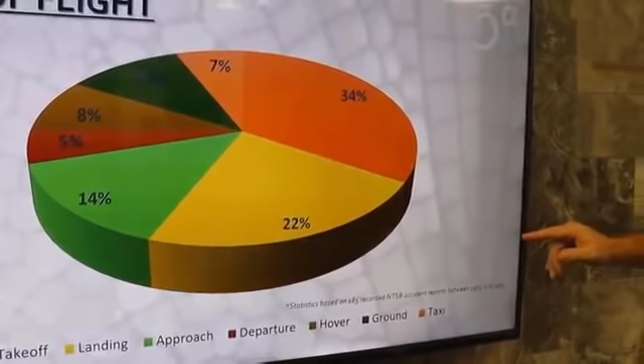Now, one of the key factors when you look at the difference between landing, takeoff, approach, and departure is that in landing and takeoff, the accident occurred at the heliport. On approach and departure, the accident occurred during the approach phase or the departure phase. So we notice a significant problem at the takeoff phase, one of the largest ones.

Less flying at night. Now, guidance for the heliport actually comes from multiple different places. And one of the challenges for the average helicopter pilot is knowing where to look for that. So there are regulations, there are codes, and there is other guidance out there.

So for the Federal Aviation Administration, regulations specifically, we look at FAA Regulation Part 77, Safe, Efficient Use and Preservation of the Navigable Airspace, or you'll hear that referred to as the NAS. The next one we look at is Federal Regulation Part 157. Now in Part 157, it's the Notice of Construction, Alteration, Activation, and Deactivation of Airports.

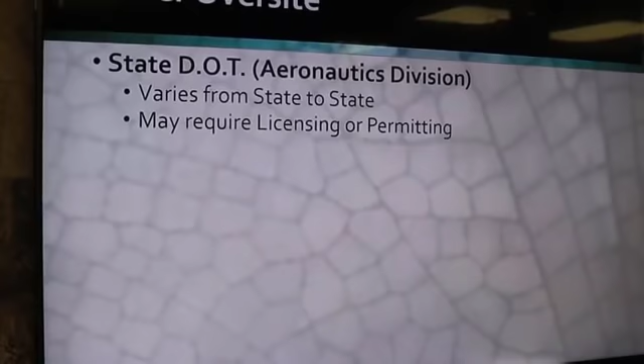guidance. Other oversight or other guidance that we deal with on heliports comes from many different locations. And these are some of the areas that a lot of people don't know exist. So we look at the State Department of Transportation or the Aeronautics Division at that DOT level. Each state has its own regulations. Every state is different. It varies state to state as far as what regulations are on the books. The people that have oversight of that are the Department of Transportation Aeronautics Division. They're the people you need to ask in that state what regulations apply.

And in many states, it does require licensing or permitting. So there have been a lot of pilots who went out and put a heliport in to find out that they did not follow the guidelines in their state. They put it in and then found out that they actually violated some regulation or code because they didn't get permission from the state and then go through them to get the license or permit.

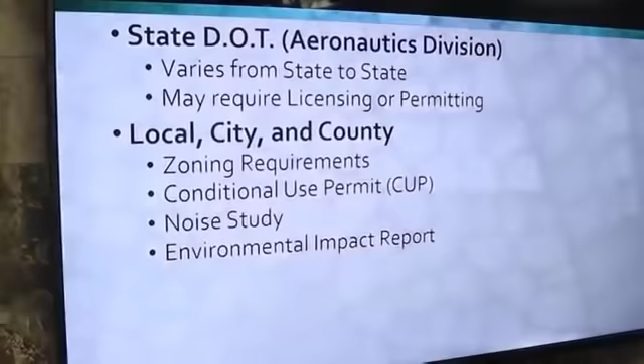Now, other areas we look at: local, city, and county. So when we look at the local municipality, they may have some things in there. Zoning requirements on heliports can be significant in certain urban areas. Most places that we deal with have a conditional use permit, or we'll refer to it as a CUP. Also, if you're in certain areas, you have to do a noise study, and sometimes you have to do an environmental impact report.

The next level we look at is the fire marshal. The fire marshal is a very integral part of this because he's probably the one guy out of everybody that has the most teeth when it comes to enforcement actions. Now, you'll hear that particular individual referred to as the AHJ, or the authority having jurisdiction. So when we get into the fire marshal, code is where he looks for his guidance. Code comes from a couple different places.

The first place we look at is the municipality code adopted. What I mean by that is a municipality can adopt certain codes from certain years and certain revision cycles. So you have to go back and really look to see what code is adopted for that location. So International Building Code is one. That really gets into a lot of detail for rooftop heliports, but there are some specifics on ground heliports in there. The other one we look at is the International Fire Code, which has some very good specifics as far as what the fire marshal is supposed to be looking at and validating this heliport on.

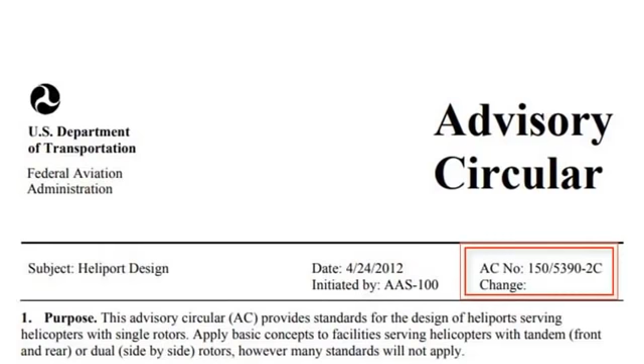The next one we look at is the National Fire Protection Association, or NFPA. NFPA has several different documents that we refer to. The first one and the most important one for heliports is NFPA 418, Standard for Heliports. In there, there's guidance that gives the AHJ what criteria need to be followed for a heliport. One of the key issues is that it points to the advisory circular to such a degree that it says all aeronautical criteria must be met per FAA AC 150/5390-2C. So NFPA 418 in effect makes the AC regulatory in a lot of locations.

Now, if you wanted to do a little bit more at your heliport, you could possibly put in a fuel system. Well, NFPA 407 goes through all the requirements for fuel systems. And then if you put in a hangar, there's NFPA 409, Standard on Aircraft Hangars. So those are some of the different things that we look at when we go into what you have to meet, regulatory code requirements, and also what best practices are.

Heliport terminology. So you might have heard me speak a little bit about this to some degree, but heliport terminology is one of the things we don't have good definitions for in the Aeronautical Information Manual. We're working on that as an industry, it's gotten better, but there are certain terms that you'll hear that the only place you'll find these defined in many cases is in the advisory circular.

So the first one we're going to look at is what's called the touchdown liftoff area, or the TLOF. The TLOF is based on 1 times rotor diameter. Now, the key here is, what is the largest helicopter that's going to service that location? And that's the aircraft that you design your heliport towards. Now, the next item that you're looking for is what's called the FATO.

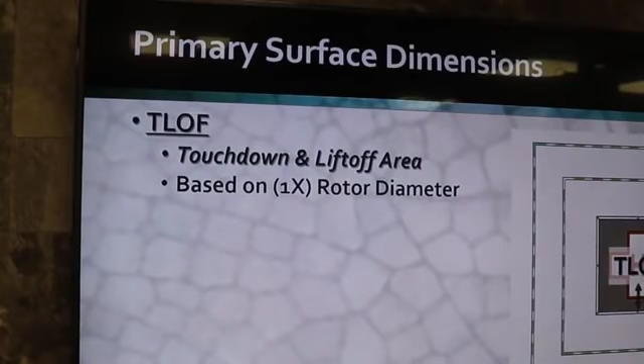Now, the key here is the hard stand. That's the TLOF. That's where you land and take off. A lot of people refer to that as the helipad. There are 3 parts to a heliport. TLOF, the next one being the FATO, or the final approach and takeoff area. Now, that area is an invisible area, which we've outlined here in green and white dashed line, just so you can see where it is.

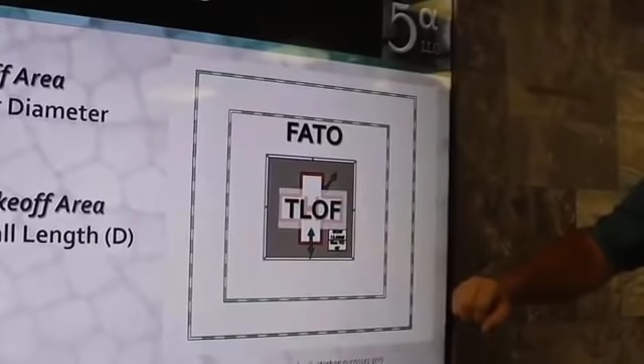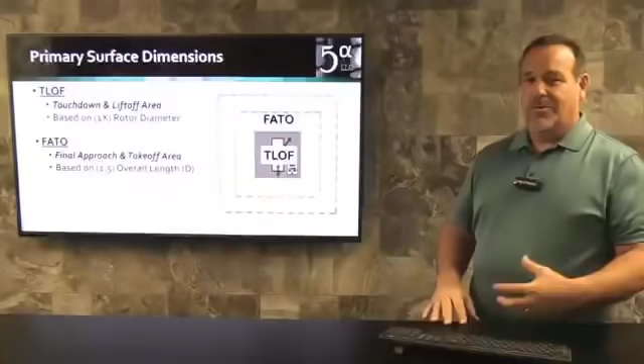This drawing is to scale. This is 46 by 46 based on a Bell 412. The outside of that TLOF is the FATO, 1.5 times the overall length of that aircraft. So that gives you, as the pilot, an area that you can maneuver without fear of running into something and hitting an object or something that's in and above the surface of the TLOF.

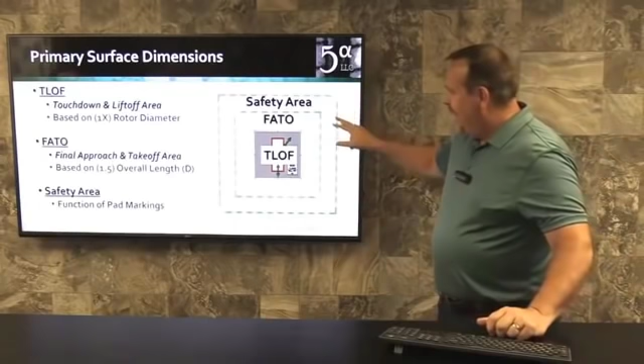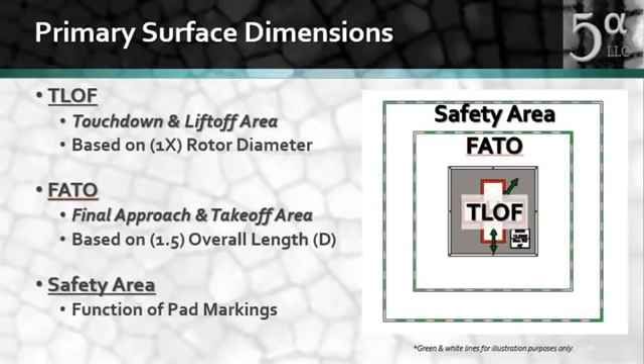The next area outside of that is the safety area. Safety area is a function of pad marking. Generally speaking, this area on the outside is usually about 1/3 of the rotor diameter, or 10 feet, whichever is greater. Now, depending on how the pad's marked, it may actually be a little larger than that. When we look at the 3 pieces we just talked about, you'll hear those pieces referred to as a heliport. The TLOF, the FATO, and the safety area.

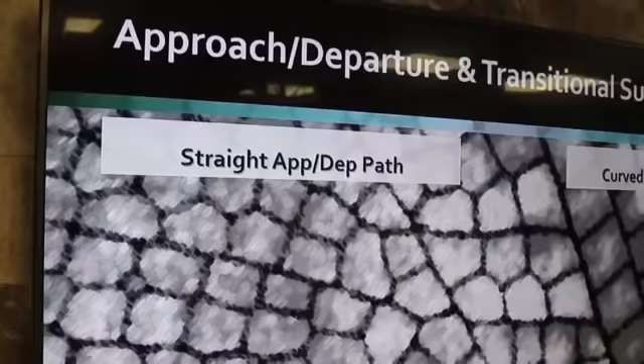Now, the airspace that attaches itself to that is different. We look at 2 different types of airspace. One is a straight approach path. One is a curved approach path. Now, the key to understand with approach paths is we have the surface, the approach departure surface. And what the FAA looks for when they come in and do an airspace study is they're looking to make sure that you have a clear, unobstructed, being the key here, approach departure path.

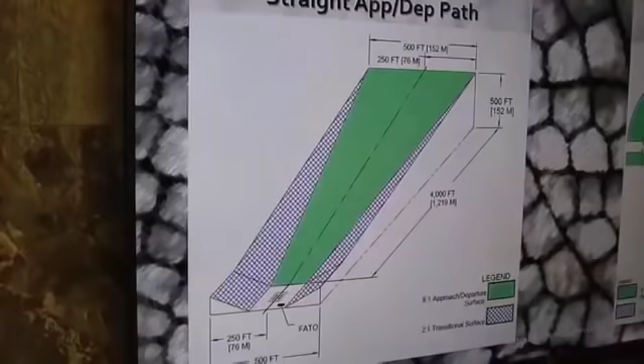This is a plane, if you will, that is a ramp going into the sky. This is your corridor to the TLOF, FATO, safety area, or the primary surface as it's referred to in Part 77. When we look at this green area here, this is referred to as the approach departure surface. That's an 8-to-1 surface, or 7.125 degrees. So every 8 feet you go out horizontally, you come up 1 vertical foot. So at 80 feet, you have 10 feet. At 160 feet, you're at 20 feet, and so on and so forth.

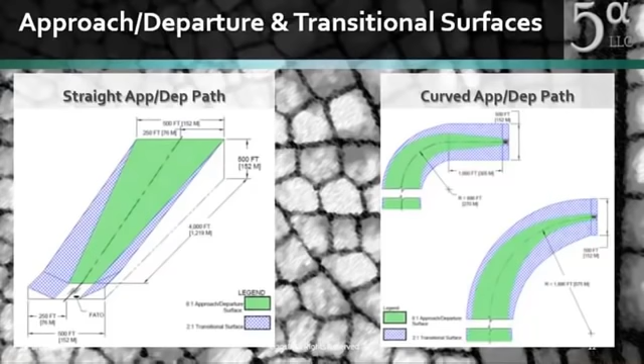What that means is if you have an obstruction 80 feet out that's 12 feet high, it's 2 feet penetration into that 8-to-1. It's, quote, an obstruction. And it either needs to be removed or the approach departure path needs to be shifted so it's not in the way. Now, most pilots don't fly this 8-to-1. That 8-to-1 is 7.125. Most pilots are going to fly a little steeper approach based on standard criteria, 8 to 10 degrees, or steeper criteria, upwards of 15 degrees. This is for obstruction identification for the FAA to make sure the airspace is clear.

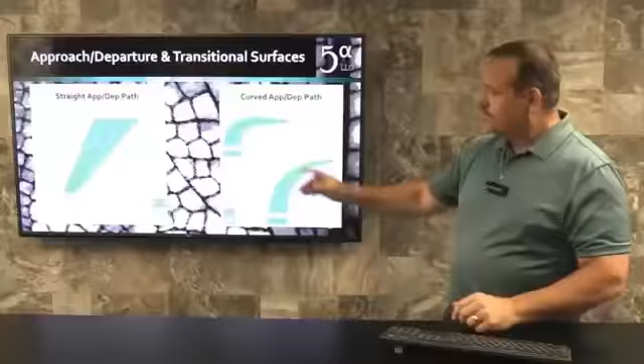Outside of the 8-to-1, in the blue surface here, is what's called the transitional surface. The transitional surface is a 2-to-1. For every 2 feet out, you come up 1 foot. It's attached to the outside edge of the 8-to-1. Now, it's up to the FAA airspace study to determine whether it's an obstruction or not, and then there's a requirement, if it is, that it could be there, but it needs to be lighted, and it needs to be marked.

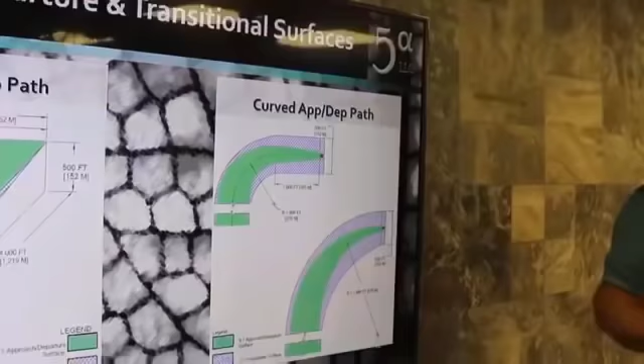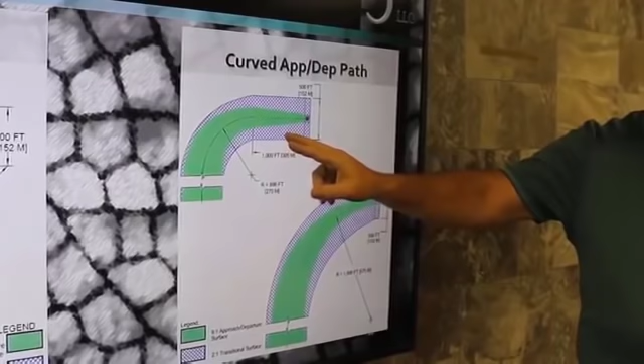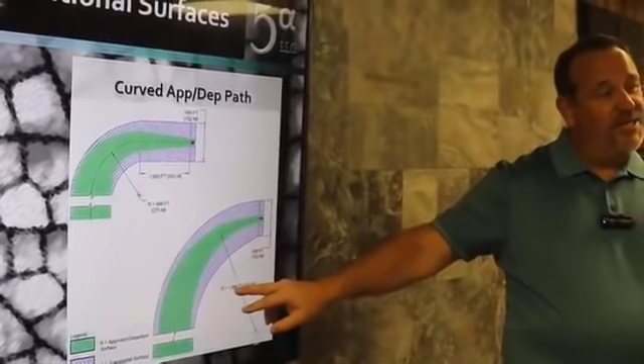Now, the other approach departure path that we can have is the curved approach. The curved approach allows us to navigate around certain things that may have noise sensitivity or towers or obstructions. The curved approach still uses the 8-to-1 and also the 2-to-1s. All we're doing here is adding a straight section of about 1,000 feet with an 886-foot radius, or we use a full radius of 1,886 feet. Again, this allows us to maneuver around certain types of obstructions, or if it's a noise-sensitive area, gives us a little flexibility.

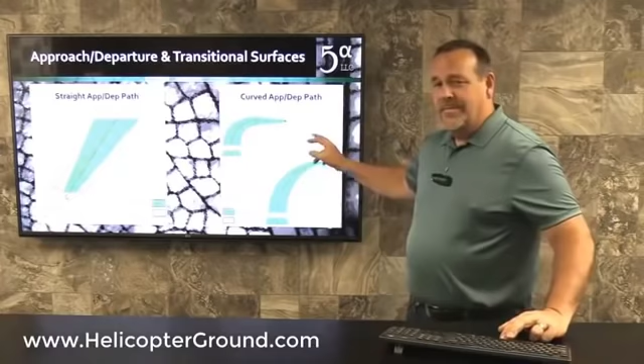One of the challenges we run into is a pilot does not know that this exists currently. As the way the regulations are written, it's not a requirement for this information to be presented on the forms that you can then look at for pre-flight planning.

One of the other key elements is who owns it and what's its use. So we talk about public. Public use means that anyone can land there. Public use means the FAA does an inspection on it, usually on an annual basis. Private means somebody owns that other than the government. Private also could be privately owned, publicly used, meaning then the FAA does an inspection and anyone can land there. However, if it's privately owned for private use, only those people that the owner allows can land there.

We get into then the reference of PPR. PPR meaning prior permission required. So it's private property, privately owned, privately used. You as a pilot just can't show up and land there. You may see it and say, hey, there's a heliport, I can land there. Don't do that because you will be trespassing.

One of the key elements that the FAA makes sure that they dictate in the advisory circular is that the owner and the operator are responsible for making sure all pilots that land at a private PPR facility are informed of all the requirements at that site, to include any limitations for that location. If you go in and try to land at a PPR facility, you've never been there and you don't know what's there, you can be really setting yourself up for a huge liability exposure. So understand public, private, and PPR are three very, very important terms when we look at utilization of a heliport.

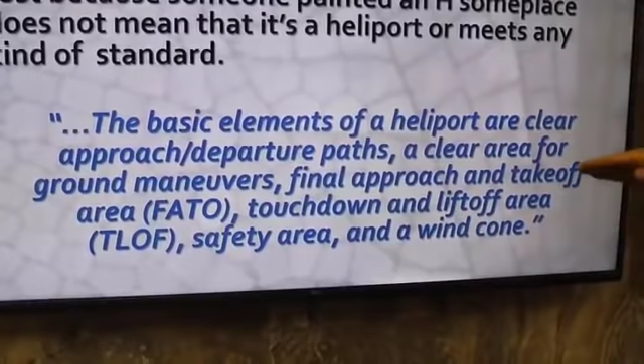The next thing we look at is a clear area for ground maneuver. We don't want to hit anything. We don't have trees or poles or wires. Then we have the final approach and takeoff area, the FATO, the touchdown and liftoff area, and a safety area, and a wind cone. So this is the definition that the advisory circular uses as the basic elements of a heliport. If you don't have that, you really don't have a heliport.

So responsibility, we talk about this as instructors to our students all the time. So we get into the instructor part and we put our instructor hat on, we talk about responsibility. PIC, whoever that may be in that aircraft, is responsible for every action that occurs in that aircraft. All the decision making in that aircraft, he is the ultimate, final, responsible decision maker.

So, what's that mean for heliports? Well, basically, the suitability of the landing area and the takeoff environment is part of that decision making. And if you don't know that that is or is not a heliport, doesn't cut it when an NTSB accident investigation comes knocking on your door when you bend a piece of metal. You have to be careful to know and understand exactly what you're getting yourself into.

If you land off-site where there's no heliport, you are taking full responsibility of those actions and anything that then happens from that flight. If you land at a heliport that's not licensed, not permitted, it's not been looked at, does not have any documentation, does not meet a criteria, improperly marked, doesn't have a wind cone, doesn't have a clear approach departure path, and you land and something bad happens, pilot decision making is number one.

You can say no, and that's important. As a pilot, you have to learn to say no. It's like, that's going to get us in trouble. We can't do that today. So I always impart that to all the pilots I work with, is you have to learn to be able to say no. That's the hardest two letters to say sometimes, but it will keep you out of trouble.

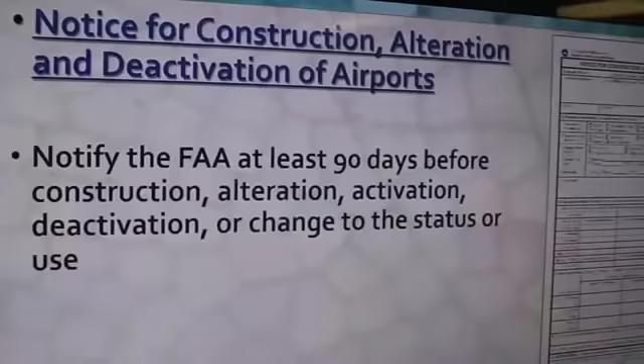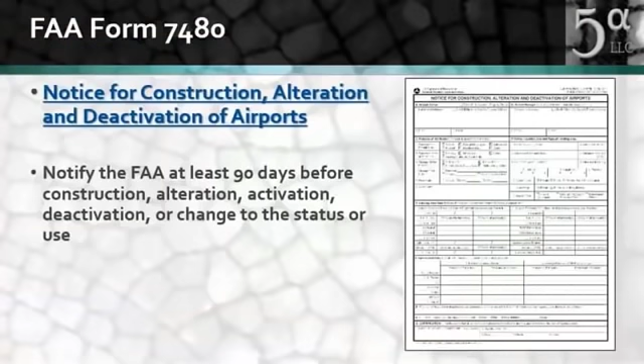Any questions on how to fill this form out or who to talk to, I would recommend talking to the Department of Transportation Aeronautics Division in your state, or talk to the Flight Standards District Office, the FSDO, that's in your area. So the 7480 is the first step. What we're doing is telling them that we're going to put in a heliport. Now, one of the criteria is 90 days prior to construction beginning. That's important. You don't build it and then notify them. Notify them before you build it.

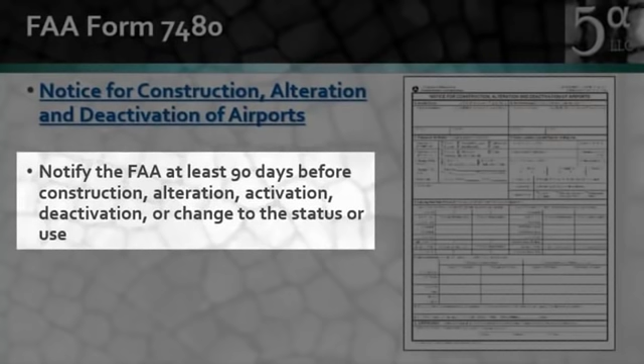Now, there have been times where the FAA staffing has been challenged because they haven't had enough people in the department. Once 90 days comes and goes, nothing says you can't start construction. It's just you've already started the paperwork. Now the next form, and this is after the heliport's been submitted, is the 5010. The 5010, and there's two, one for public, one for private, the -3 or the -5, depending on what you're putting in, is the record.

Now, the process is you submit the 7480, the FAA then assigns a case number to that at the ADO level, and it has to go through approximately anywhere from 8 to 13 different lines of business internally, depending on the complexity of the airspace that we're dealing with. Everybody signs off on it, and then they assign somebody from the local FSDO to come out and do the evaluation. What you're getting is not so much a heliport evaluation, more so an airspace evaluation.

They're going to come in and they're going to look and say, okay, where are you going to put that TLOF? Is your FATO big enough? Is your safety area big enough? What kind of aircraft are you going to fly here? What's the biggest one? What's your approach departure corridors? What's that look like? Are there any obstructions? He's going to go through a checklist.

And the checklist that they use comes out of what's called the FSIMS. That's the Flight Standards Information Management System. And in there, there's a criteria for evaluating heliports. He goes through that. Once he's done, he'll give a determination. What you're looking for in the determination is favorable. If it's favorable, he agrees with everything that you're doing.

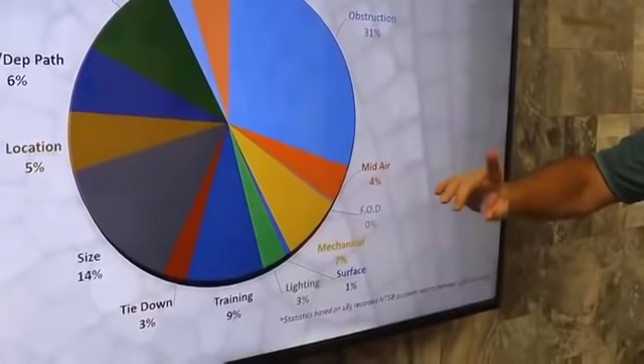Number one, an obstruction. 31% of all accidents at a heliport were caused because the helicopter hit something that wasn't supposed to be there. Whether it be a pole, a light, a wire, a bush, a tree, a building, something wasn't supposed to be there. Now, 4% were mid-airs. There was one that came up as FOD, it shows up as 0. Mechanical was 7%. That means that the aircraft actually had a mechanical malfunction and crashed at the heliport. Surface area was incorrect. Lighting.

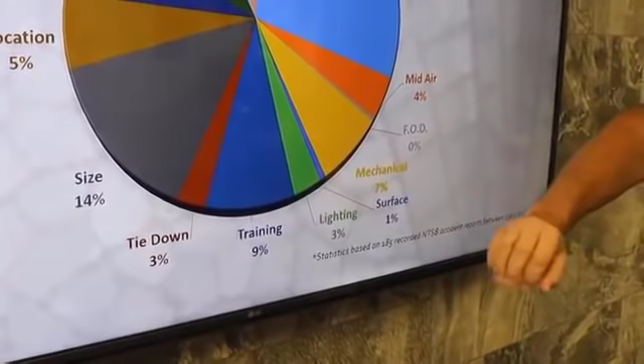Training is one we looked at because there was an accident that occurred because there was no training or improper training of either the crew, the pilot, or the people on the ground. Tie downs was one we saw. There were a couple where people tried to take off with the tie down still attached. Size basically means the heliport location. The TLOF, FATO, and safety area were undersized for the aircraft, or they were trying to put too many aircraft in too small a space and tried to occupy the same airspace. Location was in the wrong location. It was in a bad site. It was surrounded by obstructions.

Approach departure path, 6%. That means that the approach departure path didn't really exist, or it was poorly designed, or there were obstructions in that approach departure path. Wind and turbulence kind of go hand in hand. Wind, basically the pilot was trying to shoot something that he shouldn't have, i.e. a downwind approach or a downwind takeoff, because this particular location had generally one approach departure path, and the pilot tried to do something he shouldn't and asked more out of the airframe than he should have.

Then the turbulence: normally what we see is that the aircraft had an issue with the turbulence created at the heliport location, usually created because the heliport was placed incorrectly. The heliport was too close to a building, or the architecture actually created a turbulence environment for the aircraft.

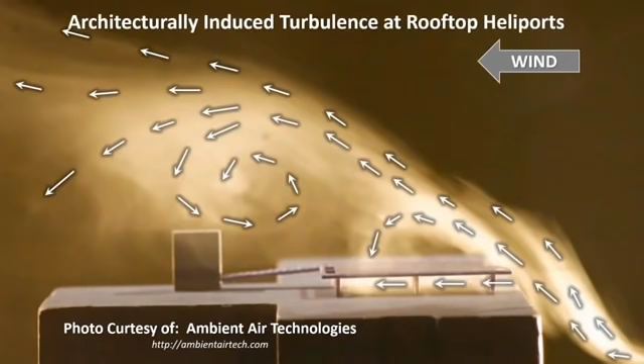So what is the relationship of architecturally induced turbulence in regards to our approach path when it comes to performance margins and controllability? This, of course, will be dependent on the velocity of the wind, the turbulence being generated by the building, how shallow or steep our approach path is, and at what speed and descent rate we shoot our approach. At first, we will more than likely encounter a direct headwind, which is what we are looking for on our approach in the first place.

However, at some point, depending on the previously stated variables, we will more than likely encounter a downdraft at the edge of the recirculation zone. And under the right conditions, this can quickly change into a tailwind, and possibly even into an updraft in short order. Finally, once we are over the heliport, that updraft may very well turn back into a downdraft.

So what does this mean at heliports with little or no air gap? Well, from a safety standpoint, if you are already operating at your aircraft's maximum performance limits and you come in too fast on your approach, this can quickly turn into an over-torque or over-temp situation with a high potential for a loss of control situation occurring. This is why it's critical when designing and placing a heliport on a building that we do it right the first time and incorporate an unobstructed air gap that accounts for all site-specific variables.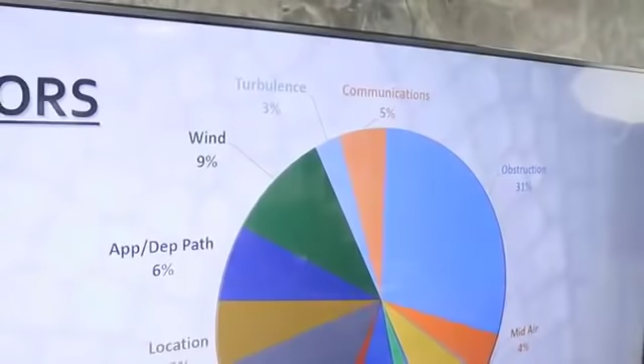And then lastly, we have communications. Somebody wasn't talking to somebody else. We've had a couple mid-airs where communication was the key. Some really bad ones where we didn't have a common traffic advisory frequency and two pilots didn't know the other one existed and they ran into each other.

So these are a breakdown of the causational factors. Obstructions being the worst offender, we broke those down. But one of the things I would say, when you look, 7% were mechanical. So reality is 93% of all these accidents were totally and completely preventable if we would have just been proactive in designing it correctly and implementing it correctly and keeping it up to date. So when we look at this, remember that 93% of these accidents in most cases were preventable.

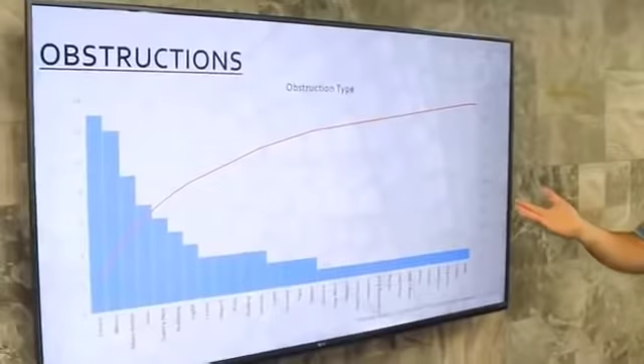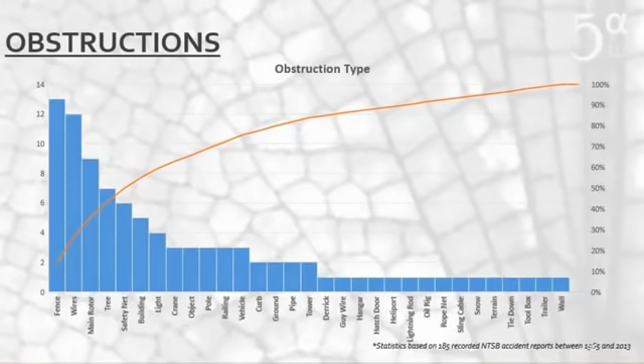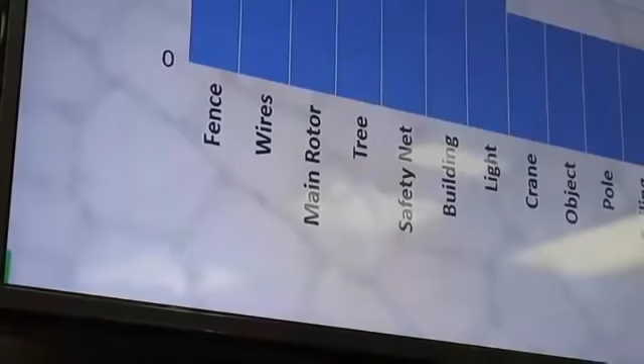So we break down the obstructions. The obstructions, we hit something. So okay, what did we hit? Well, it's interesting to note the number one thing that we hit around heliports: fences. And why is that? Normally what happens is that fence is placed too close and too high. So we talked about that TLOF area, the FATO area, and the safety area. Key component of that, all right? You should not have any obstruction that penetrates that horizontal plane by more than 2 inches. The only thing that's allowed to penetrate that up to 2 inches is the heliport perimeter lighting.

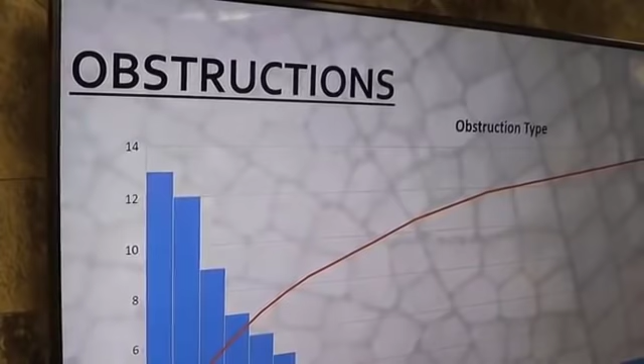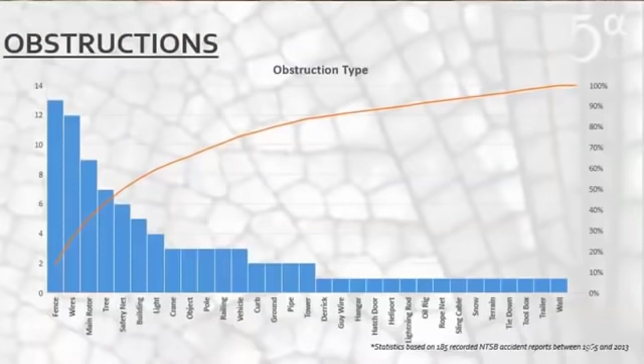So if you have these airspace blocks laid out, you can't have poles, you can't have fences, you can't have windsocks inside of those areas. These are obstructions. We want to keep these areas clear, not only for normal operations, but in case of an emergency. If you lose tail rotor authority, you lose a tail rotor, you lose an engine, you have a drive shaft failure, you lose anything on that aircraft that allows you to lose control, you want as much area for that emergency as possible. And if we box you in with a fence, you're going to hit something. So that's the key to keeping this safe.

Now, one of the things we look at is that fence also may impact that 8-to-1. Key component to the 8-to-1 is we talked about that level plane for the FATO. When we measure that 8-to-1, it's attached to the FATO, not at eye height, but at ground height. That's where the 8-to-1 plane starts, and it goes up from there. So if you had a fence that was 4 feet tall and 20 feet out, it would penetrate that 8-to-1. It would be an obstruction. And that's one of the things we see a lot of times, people will put the fence in too close. One of our recommendations, if you're building a heliport, elevate the TLOF 2 to 3 feet, have it sloping out towards the FATO, put a 3-foot fence in. Now it's even to the top of the TLOF, no obstruction.

We'll tell you right now, fences keep honest people out. The dishonest people, they're going to climb that fence. We had a gentleman that climbed a 6-foot fence in Maine to jump on an aircraft. Didn't stop him one bit. So it's really important. What's that fence for? It's to keep the honest people out, not the dishonest people.

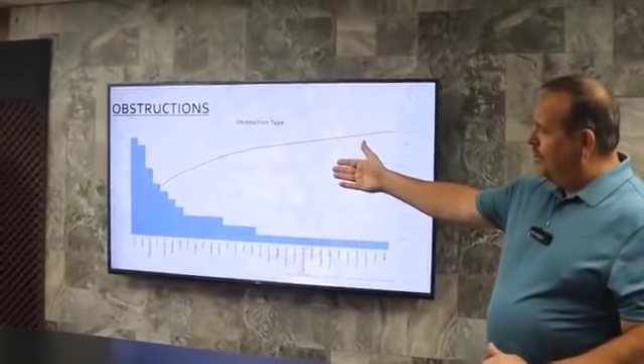Now, what else will we hit? Wires, power lines, guy wires, those are some of those things. The next one, main rotor. Main rotor, what do you mean by that? Well, basically we talked about size. 2 aircraft tried to occupy the same site. And remember, one heliport's designed for 1 helicopter. In this case, we had 2 aircraft trying to occupy 1 heliport. And somebody bent metal.

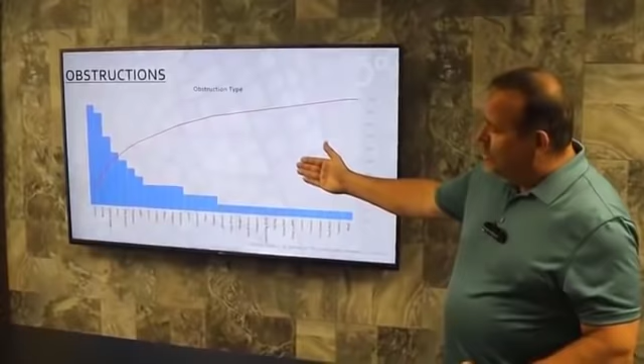Next one down is trees. One of the things we talk about with trees is while they look okay today, what are they going to look like 5 years, 10 years, 20 years from now? Some trees have a tendency to grow really tall, really fast. So look at the species of tree and vegetation that you're putting around your heliport. It's important to keep those below that 8-to-1 and outside the heliport area.

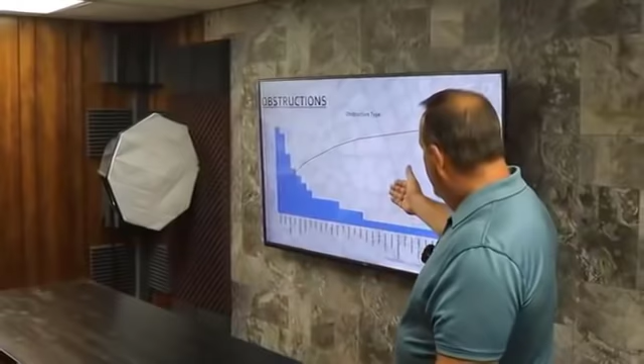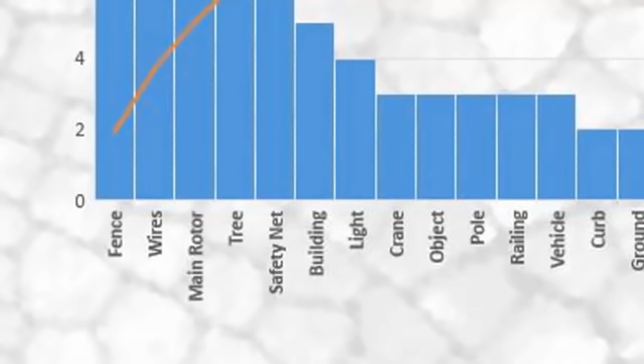Going on, safety nets, buildings, lights, cranes, objects, and they're all listed out there. But the basic top 5, fences, wires, main rotors, trees, and safety nets, these are all avoidable. Good site selection, following guidance, making sure you have a good 8-to-1 that's not penetrated, making sure the FATO, the TLOF, and the safety area don't have any obstructions, penetrations. Not only when it's built, but as you go on into time.

So when we look at that, give you some examples of what this looks like. So these are some pictures that we had that kind of gives you an idea. Remember, 1 heliport equals 1 helicopter. So I got this picture. I took the tail numbers off so nobody can tell who this is, but this is one that was forwarded to us. And I thought this was pretty interesting. This is a 50 by 50 pad basically with 3 407s on it. And when I said, that's pretty impressive, they got 3 on there. A couple days later, I got this picture.

I was like, well, that's kind of scary. I said, I suppose if you parked out a little farther, you might be able to get another one in there and get 5. But again, these are pilots trying to accommodate somebody. Now, remember this. What's this doing? This is making it convenient for somebody else. Not for the pilot, but for somebody.

Convenience kills. Anytime you try to make something convenient for you or somebody else, you're about ready to screw up. Don't do it. So 1 helicopter, 1 heliport. If you need to land more than 1 helicopter at some location, put in another heliport. Now that would be another TLOF, FATO, and safety area. Or the other option there is the FAA actually in the AC talks about parking places.

So you have the 1 heliport, then you have 1, 2, 3, 4, 5 parking places. They take up less space, but there's a criteria. There's a spacing that you need to make sure that you have. There's a diameter for that, for what type of operation you're doing. That's all in the advisory circular as well.

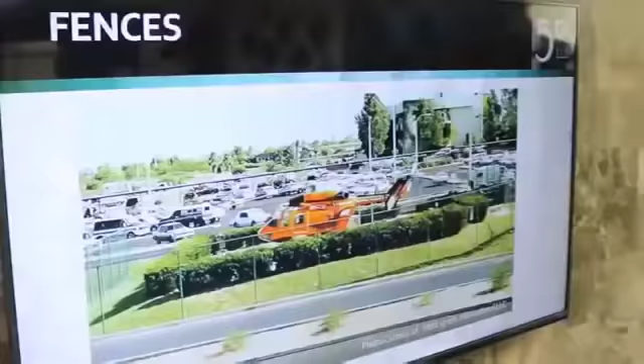So fences, we talked about fences. In this case, we call this a helicopter in a box. Not only do we have vegetation too close inside the FATO, we also have a 6-foot fence surrounding the entire area. Again, all this does is keep the honest people out, but it also makes a helicopter trap for pilots. You have an emergency situation coming in and out of this pad, you're going to have a situation that's going to get worse real quick.

Just a standard approach, and if you get a gust of wind taking off or landing, there's a good chance you're going to dip your tail rotor into that fence. That's why we don't want it there, because we have a heliport designed to meet standard and emergency operations. It's very important to keep those and look at those and make sure that they stay that way throughout the entire time.

In this case, we have a heliport in a parking lot. Not a bad place, but we also have a tower nearby. And the tower has guy wires. This is approximately 380-foot tower. So guy wires on 3 sides. Now this picture doesn't show it real well, but you can see the tower here. You can see the shadow here. The guy wires come off. They did put balls on here. They aren't required to mark it.

But the thing is when you look at it from the ground level, here you can see the guy wires here, here, and here. There is no way that you can get into this heliport from the north to the west without going through those guy wires. This particular heliport, guess what? It didn't have a 7480, it didn't have a 5010, none of these obstructions were identified. So, again, it's a helicopter trap. Doesn't meet the criteria.

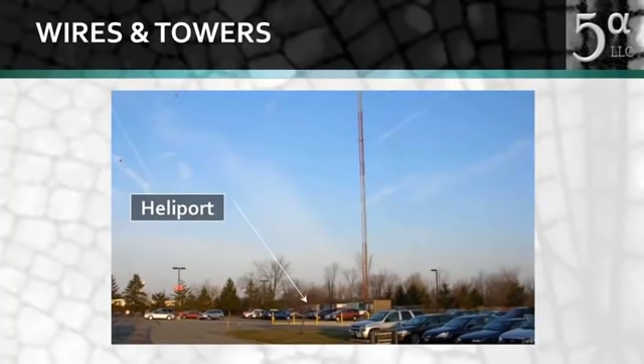So wires and towers, here's another example. So here's the heliport. Now notice that this heliport is asphalt. Don't ever make a heliport out of asphalt. Helicopters stick in asphalt on hot days. One of 2 things can happen. One skid may stick and the other one release. Guess what? Now you have a pivot point, you have a rolling moment, you can get into dynamic rollover.

Also, having had this happen to me, you can actually have a large chunk of asphalt stick to the skid on takeoff, get about 50, 60 feet in the air, and it lets loose. Heaven forbid it hits somebody. In my case, it only hit a BMW. It was okay. Well, it was covered by insurance.

But also here, see, we have the power lines here, we have the building here, we have fence here, we have cars here. Notice where this picture was taken from, though. It was taken from on top of a building, so this is a really tight area. You can't really get into this and out of this. It doesn't really even have an 8-to-1. So this is one that's surrounded.

Now, when we look at trees, what do we say? Trees grow, and they can become a huge issue. So when we look at this heliport here, we don't want to put it next to a tree. We want to put it far away, because one of the biggest challenges you're going to have is if you say, hey, we're going to cut the tree down. You have just become a lot of people's worst enemy in your neighborhood, because nobody wants to cut down good trees. Good prior planning will help avoid that. Pick a good location, and then don't plant trees next to your heliport once you do.

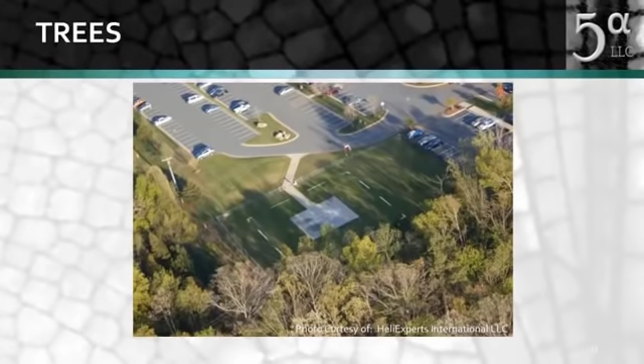Now, we talk about safety nets. Safety nets are a requirement on any heliports elevated above 30 inches, so we see this primarily on rooftop facilities. But the safety net, remember the TLOF, the FATO, and the safety area, primary surface, nothing is supposed to be above that except for the lights, and only 2 inches.

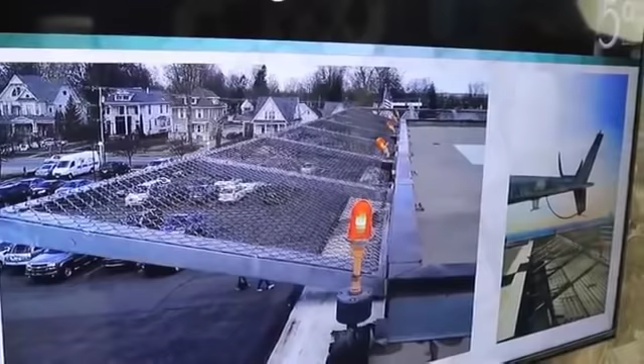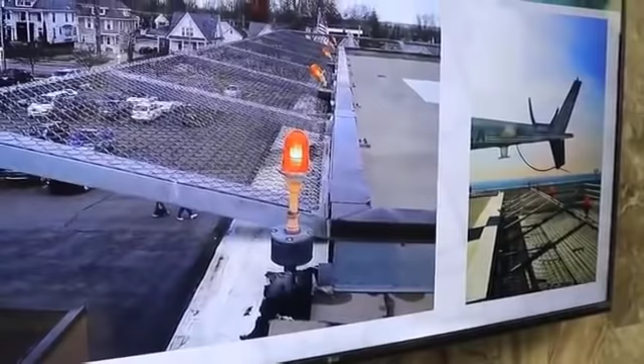Well, in this case, these safety nets actually stick up quite a bit. You can see where this tail rotor is actually closer to this. These are pivot points for dynamic rollover. These are locations where our tail rotor can actually impact something and have a catastrophic failure.

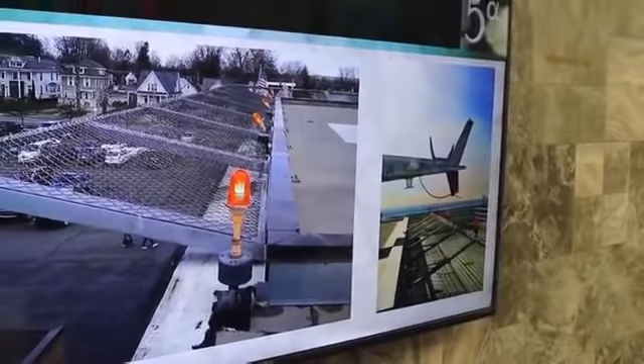Now at an airport, these lights are designed to be breakaways. Well, we don't want those on heliports. We want to make sure that we don't have any impact area for these tail rotors, because tail rotors don't do well with impacts. So on a safety net, we want to make sure this is slightly below the edge of the pad.

Now, this is a safety net that was improperly installed. Basically, it should have been on the outside of the building. They put it on the inside of the building. Now we not only have a trip hazard, as well as a hazard for catching the skid, or potential for catching a tail stinger or a tail rotor, depending on the model of the aircraft that we're flying.

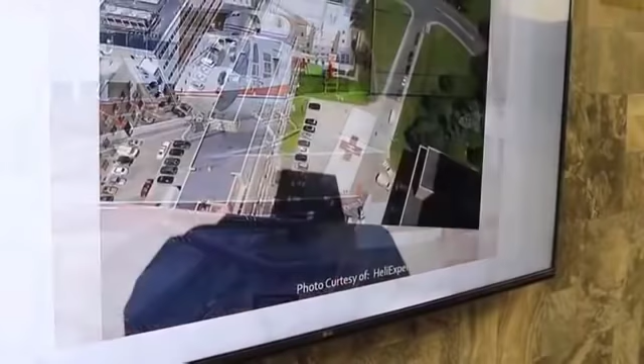When we look into buildings, how can you hit a building? All right, well, here's a good picture. So here's a building, here's a building, here's a building, here's a building, here's a heliport. This doesn't do it justice, but this is a high point to a low point. So this is not only surrounded, it's at the lowest point, and there's a fence that runs beside it. So to get in and get out, there's one way in and one way out.

And if you're on approach here and you have an emergency, you have no flyaway. And depending on what you're flying, whether it's single or twin, or if you don't have the emergency power for an engine failure in a twin, it's going to be a bad accident.

So we talk about 2 approach departure paths that are unobstructed to deal with winds. This is one that shows a single way in and single way out, which is also surrounded. That's definitely not the way we want to fly. We want to have as many outs as we possibly can in case of an emergency.

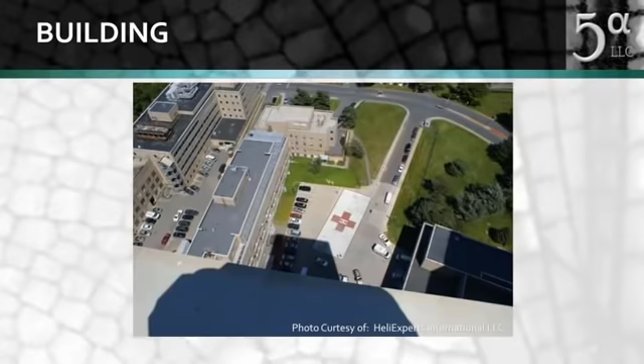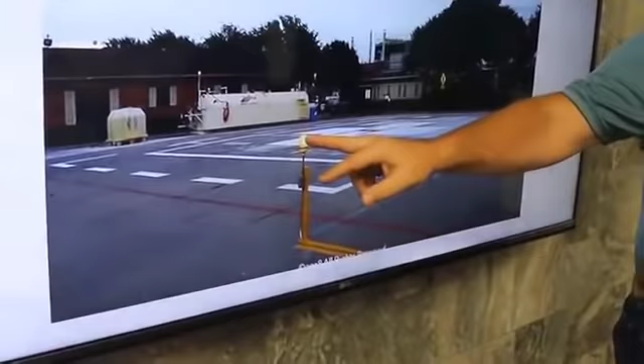So lights, we talked about that peripheral being 2 inches. So this is a light that was too tall. You can see where it sticks up about 3 feet right here. So that's, again, something that you can hang a skid on. And it doesn't take much to roll a helicopter over if you hang it up on a skid by accident and don't notice it, especially at night, and you get that rolling motion going and you go beyond the critical angle, boom, it's over.

Now, the other thing I want to point out in this picture is not the lights. We talked about the National Fire Protection Association 418. A critical criteria in there is storage of fuel and also compressed gas. Notice where this fuel tank is, right here. The 418 specifically states that any fuel tanks for storage or any compressed gas shall be located 50 feet outside the FATO. So if you do have an emergency or an incident, you don't make it 10 times worse because now you've involved fuel.

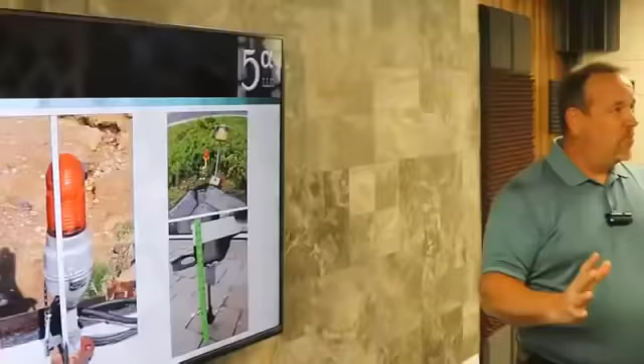Or worse yet, at a hospital, you have liquid oxygen next to it. So these are one of those little things we look at. The light's definitely one, the fuel's another one. Here's a couple more pictures of some of the other lights we see out there that are too tall. And we get into situations. You see this one down here. You can see how close the tail stinger is on that particular aircraft to that light.

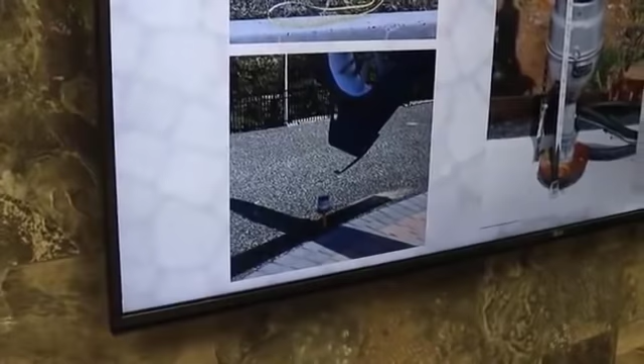Now, poles. These are meant to protect the heliport from people parking on the pad. Problem is, it's something that the helicopter can hit. We see here we have the poles. These are about 4 feet tall. These are a little shorter, about 3 feet tall. These are poles that were put in, but they don't meet the criteria.

Remember, the TLOF is the landing and takeoff area, then the FATO is the maneuver area. These are in the FATO. They shouldn't be there. Why? Because we can hit them with a helicopter and cause significant damage.

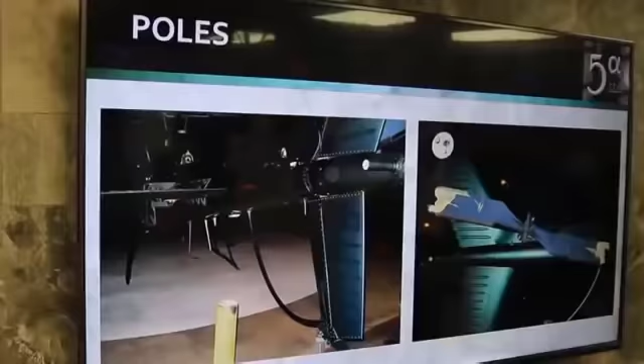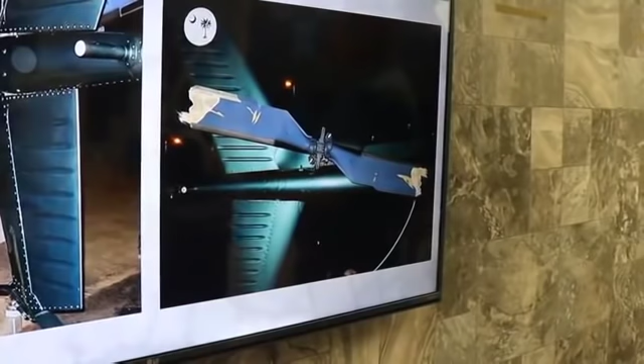As an example, here's what that looks like. So here's a 40 by 40 pad with a steel pole next to it, and you can see what happens when you have impact. Now, having been involved in that particular case, I can tell you that a sudden stoppage on this, an AS350, ended up costing a total of approximately $350,000. That's a huge chunk of change. We don't want to spend that. We don't have enough money to fly and put gas in the tank, let alone deal with this. So we don't want this pole anywhere near our heliport.

That is something that the pilot can refuse to land at. Say, hey, it doesn't meet criteria. I'm not going to land there. Will you get blowback? Possibly. But at the same time, you don't want to be paying for this.

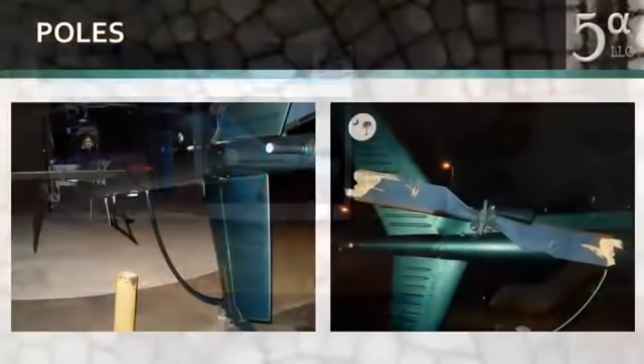Now, we covered a tremendous amount of information. We talked about the Heliport Advisory Circular. That's the one primary guide in the United States. You can find that on the FAA website. It's AC, or Advisory Circular 150/5390-2C. It gets revised about every 5 to 7 years. You can get that and download that for free.

It's information that's available. Also, Part 157. You can go find that on the internet. Part 77 is on the internet. All the state DOTs have an aeronautics division. You can get information directly from them. And some states have criteria. Again, we live in the state of Indiana, so the DOT has a permitting process for heliports. Go through the state DOT, and they're a great group of people, and they will help you get your heliport permitted. They'll help you submit the 7480, and then you'll work with the FAA to get the airspace study done, and then move forward to getting a 5010. Remember, that identifier is key to knowing that you exist.

Not only for you, but also for all those other people out there flying. And really, today, it's all the UAS and drone people. You want to make sure they know you exist. Because the last thing you want to do is be on final approach or takeoff and meet a UAS or drone pilot operating in your area. He may be doing all the right things, and all of a sudden, you have an impact. That would be a bad day.